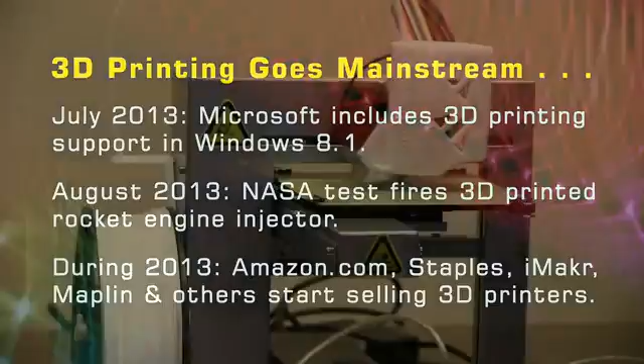Given that 3D printing is already a multi-billion-dollar industry, more and more companies are keen to get involved. Aside from 3D printer manufacture, several business opportunities now present themselves, notably including enhancing product design, transforming traditional production, direct digital manufacturing, and facilitating personal fabrication.

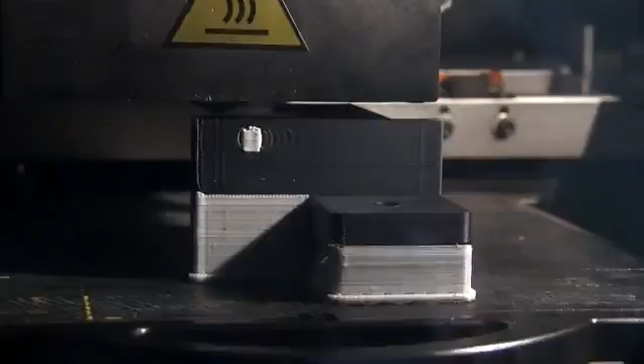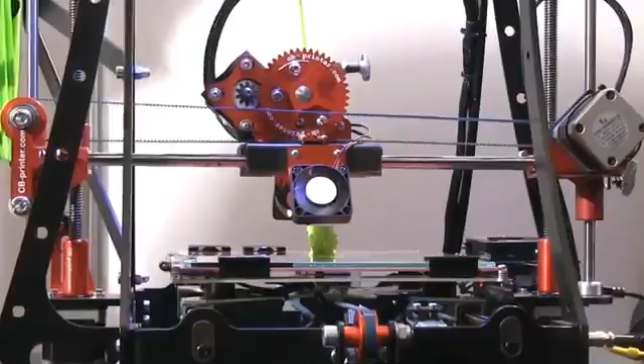Today, most large manufacturers use 3D printers to create rapid prototypes that speed or otherwise improve their product design. The use of 3D printing for this purpose is therefore not revolutionary. This said, as desktop 3D printers get cheaper, more accurate and more reliable, opportunities are starting to exist to create concept models and prototypes far earlier and far more frequently.

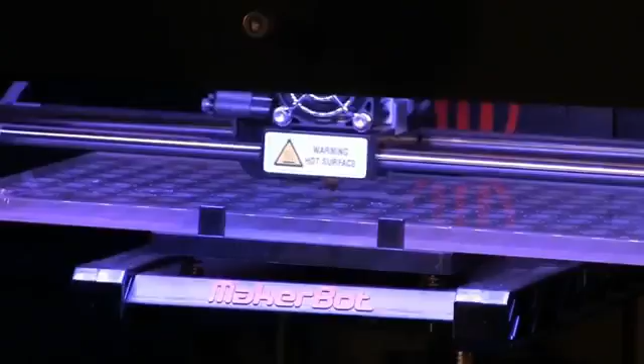Only a few years ago, an industrial stereolithographic 3D printer cost at least $100,000. And yet, in November 2013, a desktop model called the Form 1 will start shipping for $3,299. It's also been reported that some Ford engineers now have MakerBot consumer 3D printers on their desks. The question for manufacturers is therefore not whether they're using 3D printers in product design, but where and how frequently.

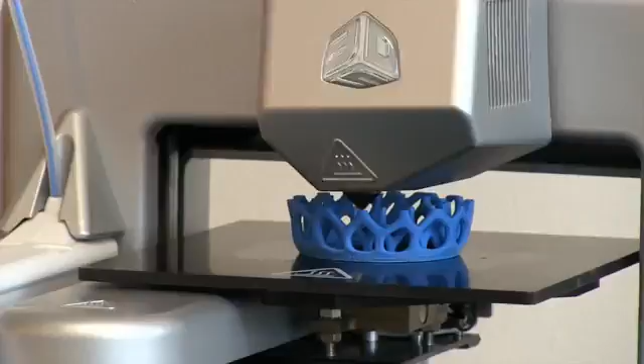Just as personal computers escaped from corporate data centers in the 1980s and 1990s, so today it's time for 3D printers to invade a great many offices.

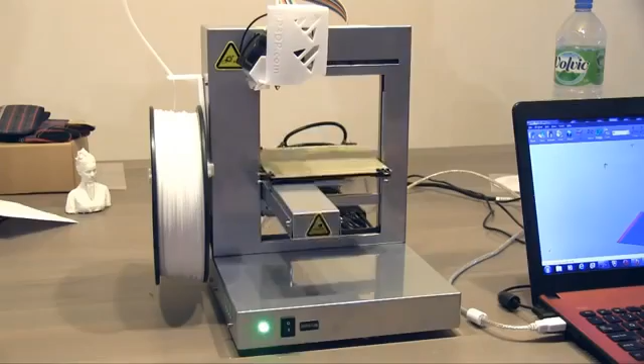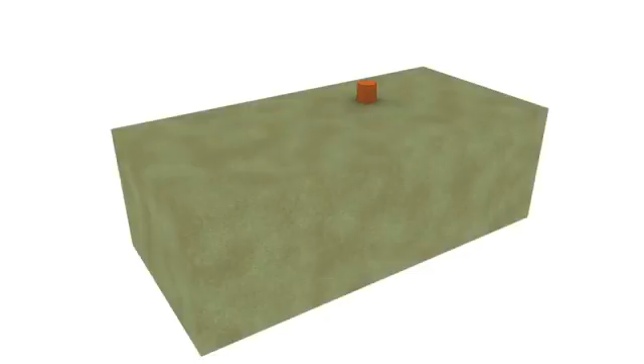Many traditional manufacturing processes are costly and time-consuming to tool up. For example, the production of metal parts using sand casting requires a pattern to be created around which sand is packed. The pattern then needs to be removed from the sand, which often requires the mould to be broken apart and reassembled. Molten metal is then poured in, which cools solid, and the sand is broken away to reveal the final part.

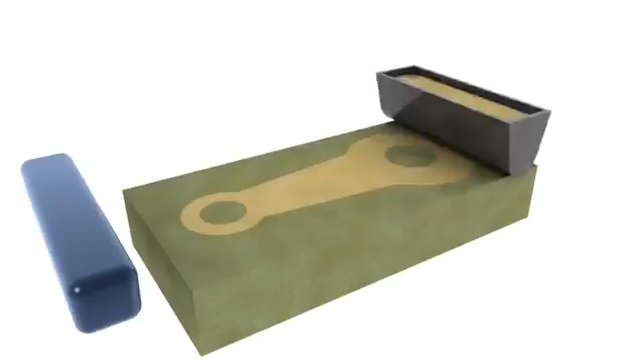Today, 3D printers from pioneers including ExOne and Voxeljet allow for patternless sand casting. Here, layers of casting sand are laid down and selectively sprayed with a foundry-grade resin. This allows the direct and rapid creation of sand casting moulds into which molten metal is then poured. By 3D printing sand casting moulds, manufacturers can save a great deal of time and money.

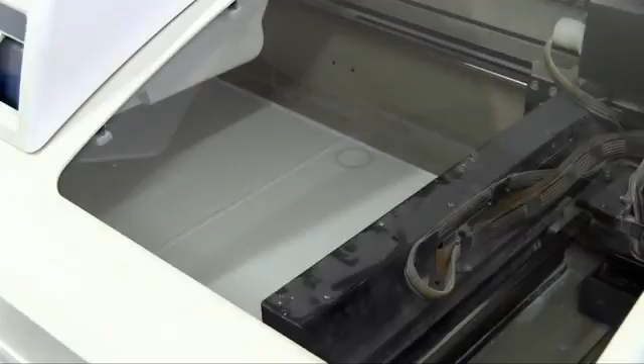For example, the US Navy has managed to reduce the lead time for producing submarine compressor pumps from 51 weeks to 8 weeks, and the cost per unit from around $29,000 to $18,000. Across many industries, similar opportunities exist to use 3D printing to reduce the time and cost of mould making or other production tooling, and this is something that no manufacturer ought to ignore. In the short and medium term, it's also the area of industrial 3D printing application with by far the greatest business potential.

As several pioneers now demonstrate, opportunities already exist to directly 3D print some final products or parts thereof. For example, Nervous System 3D prints lamps and many items of jewellery. Via an app on the Nervous System website, customers can even create custom products, which Nervous System then gets 3D printed in nylon using the Shapeways 3D printing service.

Another artist using 3D printing to create her products is Bathsheba Grossman. As she explained, with the advent of 3D printing, this is the first moment in art history when sculpture can, in a sense, be published.

Other pioneers include Makie and That'sMyFace.com, both of whom are using 3D printing in toy manufacture. On the MakieMe website, customers design their own unique dolls that are then 3D printed. Meanwhile, over at That'sMyFace.com, customers upload a front and side image of their head, which can then be 3D printed and added to a range of action figures.

Other companies creating customized products using 3D printing include Protos Eyewear, who are 3D printing spectacle frames, and Bespoke Innovations, who 3D print fairings for prosthetic limbs.

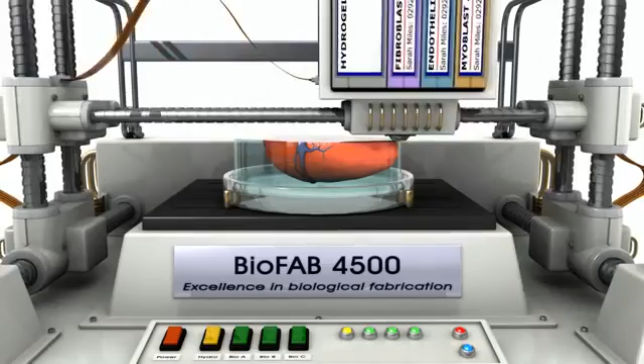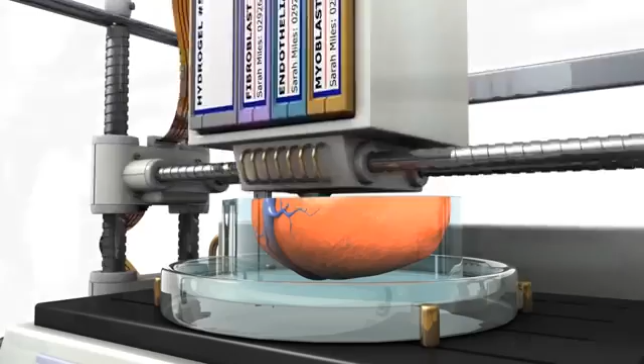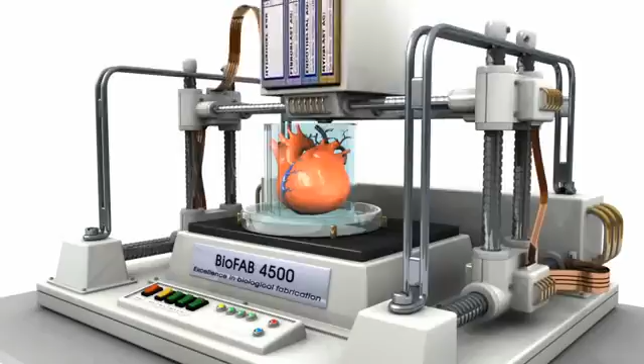Another and quite distinct form of direct digital manufacturing is bioprinting. Here, specialist 3D printers lay down layers of cells that fuse together to create replacement living tissue. Already, pioneers including Organovo have managed to bioprint human arteries and liver tissue. At present, applications are limited to the creation of tiny tissue samples for drug testing, but within a decade or so, we should expect the first use of bioprinted materials in transplant surgery.

In time, healing wounds by bioprinting directly onto the body may also become a possibility, something that is already being worked on at the Wake Forest Institute.

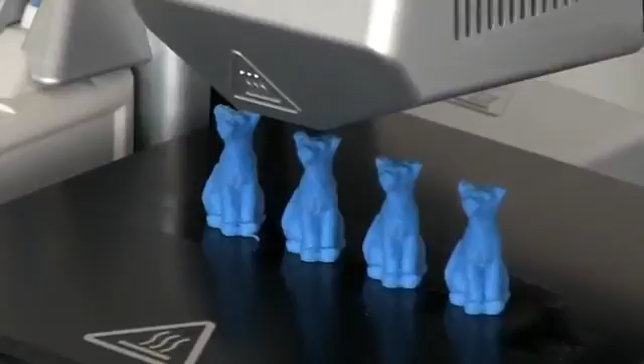Personal 3D printers can now be built or purchased for a few hundred dollars. As such hardware enters the mainstream, more and more people will be 3D printing things at home, and smart businesses are already starting to recognise this fact.

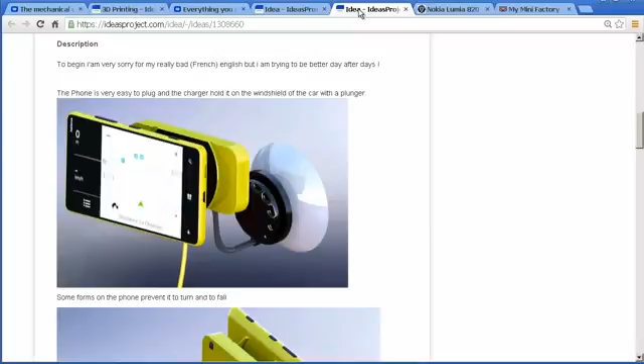For example, in January 2013, Nokia released a 3D printing development kit for its Lumia 820 smartphone that allowed anybody with 3D printing skills to produce a custom casing. Within only a few days, 3D printing enthusiasts were exchanging and showcasing their designs.

In addition to helping customers modify, personalise and repair their products, many organisations could very easily start to offer promotional 3D object downloads. Today, free apps or screensavers are common giveaways, and within a year or so, any marketing campaign that does not include 3D printable content will be missing an easy trick.

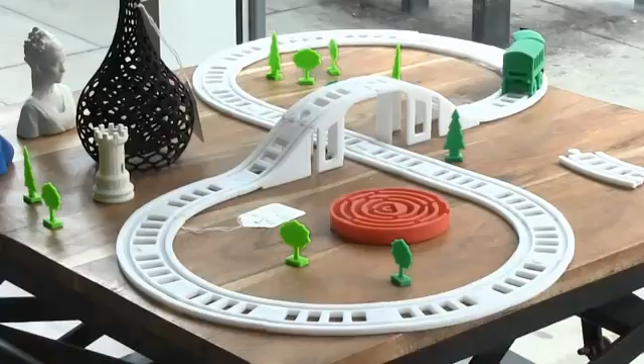In retail, there are also opportunities to start selling both consumer 3D printers and consumables, as well as 3D printing and scanning services. In 2013, some of the first 3D printer stores opened around the world. But right now, most people do not live near such a retail location, leaving a massive hole in many markets.

So, what do businesses need to know about 3D printing right now? Well, here are just a few of my own predictions.

Firstly, 3D printing will drive a revolution, but it will not replace most traditional manufacturing methods. Rather, within 10 years, I estimate that 3D printing will be used directly or indirectly in the manufacture of about 20% of products or parts thereof.

Secondly, the desire to achieve material savings will drive the adoption of 3D printing in many industries. This is due to the fact that 3D printing is an additive rather than subtractive process that can achieve minimal wastage. Thirdly, within a decade, scanning and digital inventory will have a big impact on spare part availability and product repair.

Fourthly, opportunities will increasingly exist for customised products with one or a few 3D printed parts. Today, far too many people are dismissing 3D printers as production tools because they can't manufacture an entire product. In sharp contrast, a few smart pioneers are starting to customise or otherwise transform their wares by adding just a few 3D printed components.

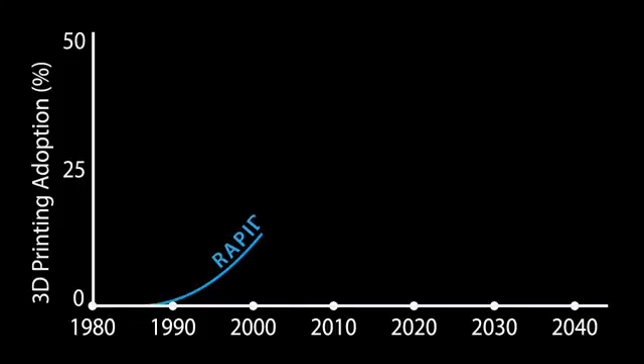The adoption of most new technologies follows a well-understood exponential curve, and for 3D printing, several of these can now be identified. For a start, since the late 1980s, 3D printing has been used for rapid prototyping. More recently, we've seen the start of adoption curves for the transformation of traditional production, direct digital manufacturing, and personal fabrication. In a decade or so, all of these are likely to be mainstream activities.

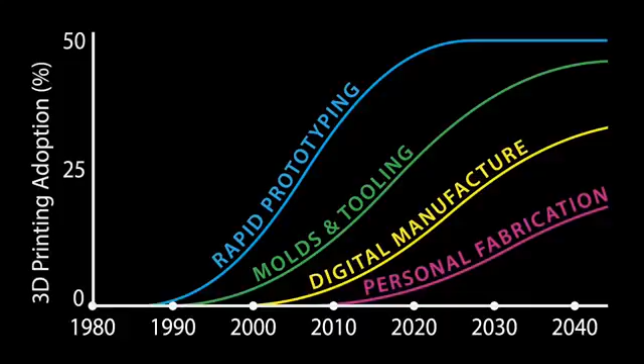But before that occurs, there'll be possibilities for early adopters to achieve some significant quick wins.